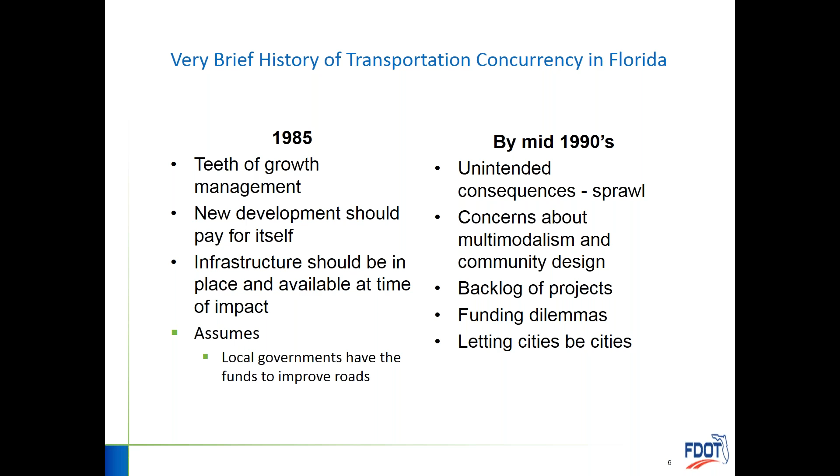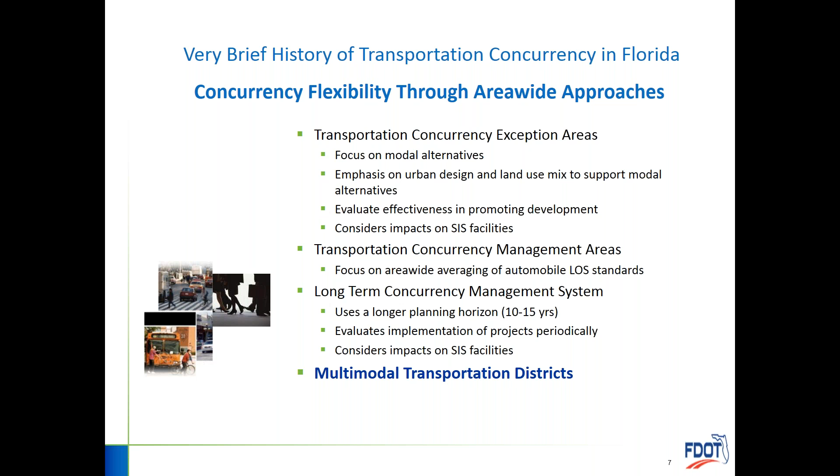And then Gina mentioned some of the flexibility approaches to dealing with the limitations of concurrency. Multimodal transportation districts were sort of the last generation of exceptions.

Now we'll get to the not-as-brief history. It's a non-auto mobility focus. Right out of the statute, it said primary priority is safe, comfortable, and attractive pedestrian environment, convenient interconnection to transit, and then the next bullet down, secondary priority is vehicle mobility. This is pretty big stuff in 1999.

And then there were also various funding opportunities with different strategies and monitoring. This is the handbook that came out. Both of these came out in 2004, I believe, maybe the end of 2003 for the handbook. The companion document is the model regulations and plan amendments for multimodal transportation districts, which provide the DNA, so to speak, on how to do this.

I should point out that the legislature directed FDOT to develop multimodal level of service methodologies and also to allow an area-wide level of service. That was the genesis for this work.

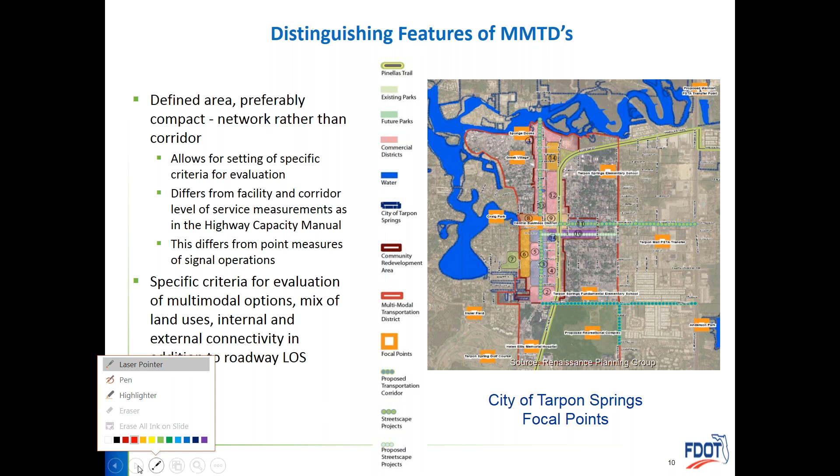So as part of doing the Tarpon Springs MMTD, the first thing, once they determined what the boundary of the district would be, is to do a summary of existing conditions. This slide shows the MMTD segments for Tarpon. The multimodal district is bounded in blue, and one of the things that's nice about this type of development is that the boundary was chosen to encompass the community redevelopment area as well, so they could use some of that tax increment financing to help with the actual development.

So in doing that existing conditions summary, the pedestrian level of service was not bad on those key segments, and even the connectivity was not bad. The detriments were the auto-oriented land use with large setbacks, parking lots, and then the traffic volume on Alternate 19 creates quite a barrier between different parts of the district.

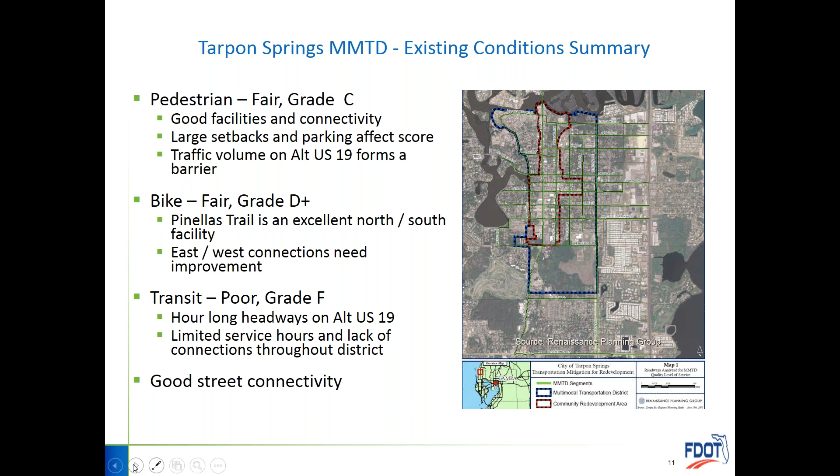Now, going back to the handbook, we'll get a little more into this, but I just wanted to point out that as part of establishing a multimodal district, the idea was to also set targets or standards for the level of service for each of the different modes. In the handbook, they give two samples of what those targets could look like. One is more transit-oriented with better transit level of service, and the other is more non-motorized oriented, with better bicycle level of service but lower transit level of service. This is just to show the idea that you can do some trade-offs, and we'll show later in the presentation how these can be tailored for specific facilities or zones.

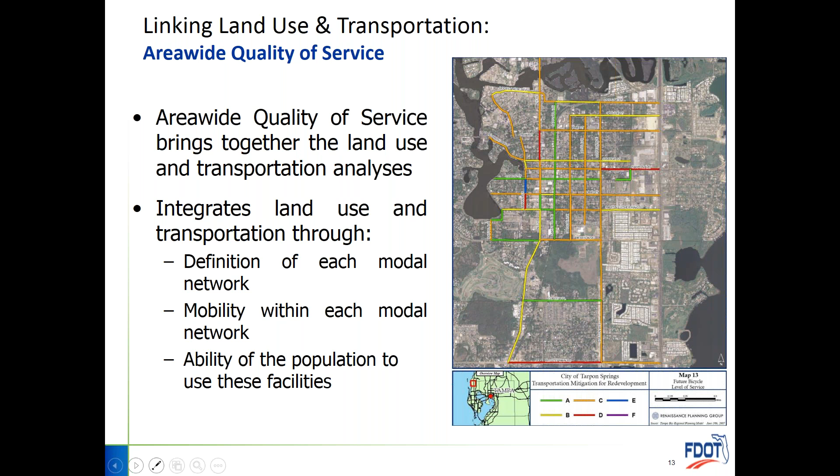The area-wide quality of service brings together the land use and the transportation analyses. The way that's done is that you define each modal network, just as you define the boundary. You define which facilities you're going to focus on and measure, and that provides the key mobility. Then you measure the mobility within each modal network, which is what this map is doing. And then the last piece is where you look at the ability of the population to use the facilities and to actually get where they're trying to go.

This shows what the 2025 build-out analysis is of the MMTD. Tarpon used the SmartCode for their district, and we're going to talk a lot about different codes and contexts in the coming slides. But based on those densities and intensities within the CRA and future land use, it was determined that there'd be roughly 4,000 households, almost 8,000 population, and a little over 8,000 employees would be expected, and that it would increase 8,000 trips onto US 19. So you have a defined area, you have a reasonable projection of what build-out's going to be.

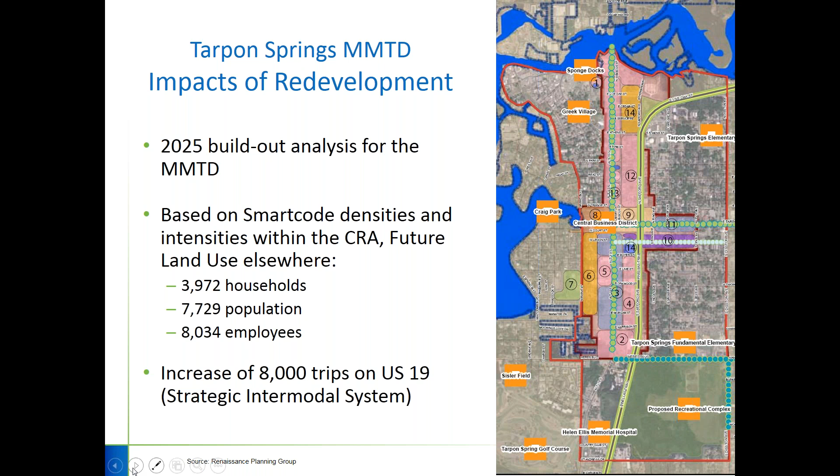So that provides a framework to begin to, as we'll show later, how you can use that framework later to cost out what it's going to be to create this build-out.

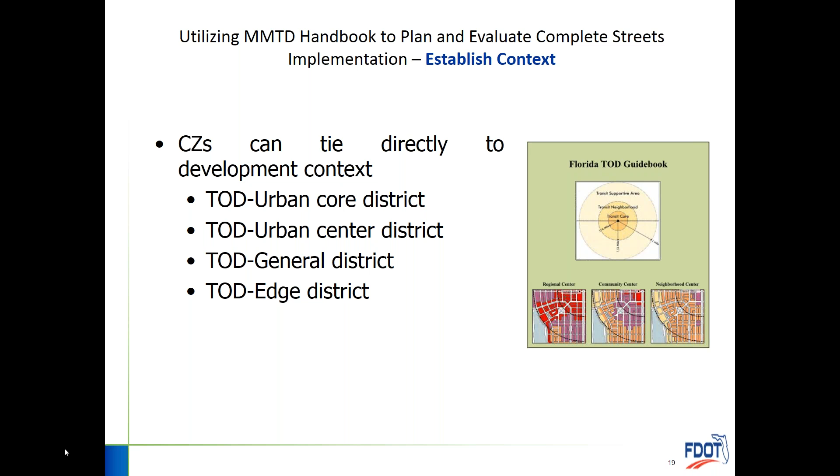We also looked at Florida's TOD guidebook, which is designed to provide guidance as to what really is a transit supportive area. And like the other documents we talked about, there's an urban core, an urban center, and again different levels of intensity. We compared how the TOD guidebook compares with some of the MMTD guidance, and it really was a pretty direct comparison.

So the MMTD guidance really applies to the more urban, and so it makes sense that the TOD guidebook would be very equivalent in terms of the type of development that's transit supportive.

One thing in the implementation of these is that the criteria really are targets, indicators of success, what you should plan for, as opposed to what's on the ground already. So there's some flexibility, you may or may not hit all of the targets, but it might make sense that it really is one of these different zones.

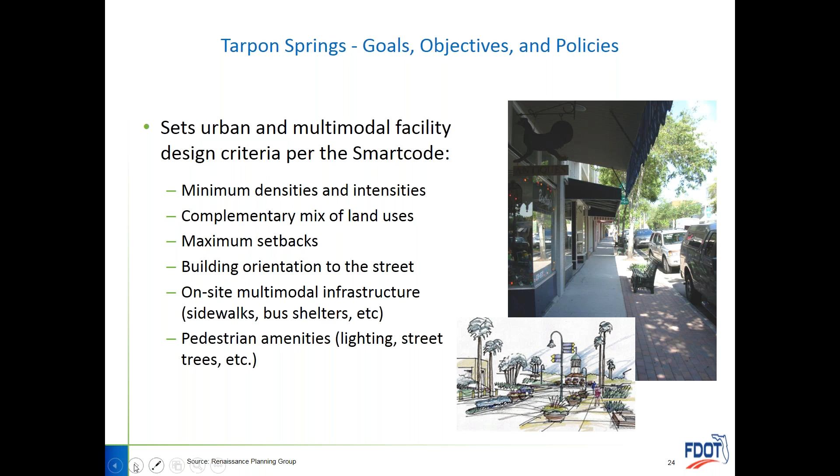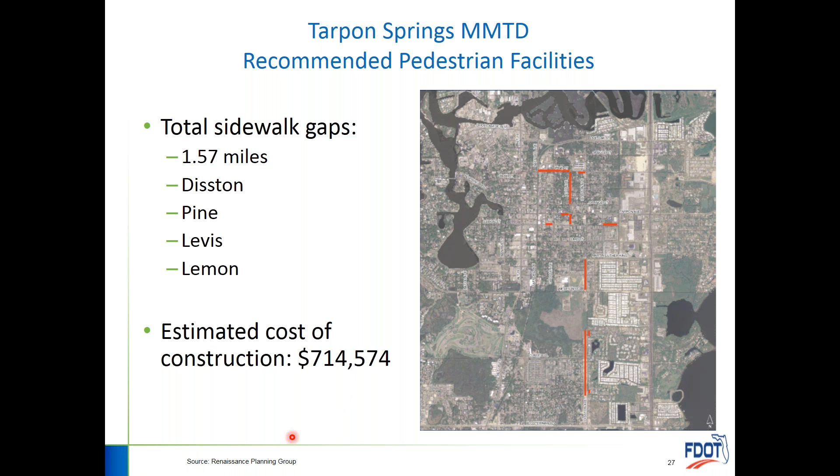For transit, the decision was made to put together a circulator route that ran 6 days a week, 16 hours a day, with 15-minute headways. And they were able to estimate the annual operating cost, and then also to increase the frequency on the alternate 19 route to two buses an hour.

And one of the really nice things about this type of scheme is that they were able to fold annual operating costs into their funding plan for the district, so that one of the things that's often difficult with transit - finding the money for operations and finding that money for a defined period of time - that was one way of doing it.

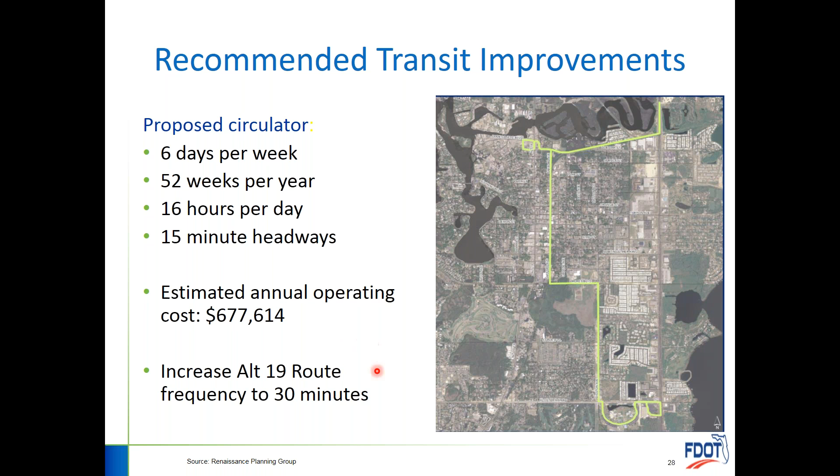So in terms of funding this now, you calculate the total cost of the capital improvements, determine the number of acres of land available for redevelopment, and then calculate the total number of units and floor area that can theoretically be constructed. And then based on that, calculate the trip ends. What's not in this slide is multimodal trip ends and that whole calculation process, but that's implicit in the idea.

And then calculating the cost of the trip by dividing the total cost of all the improvements and transit service by the total number of trip ends. And then you come up with a per-trip cost to the proposed project, and you can call that a mobility fee, or an impact fee on steroids or something to that effect.

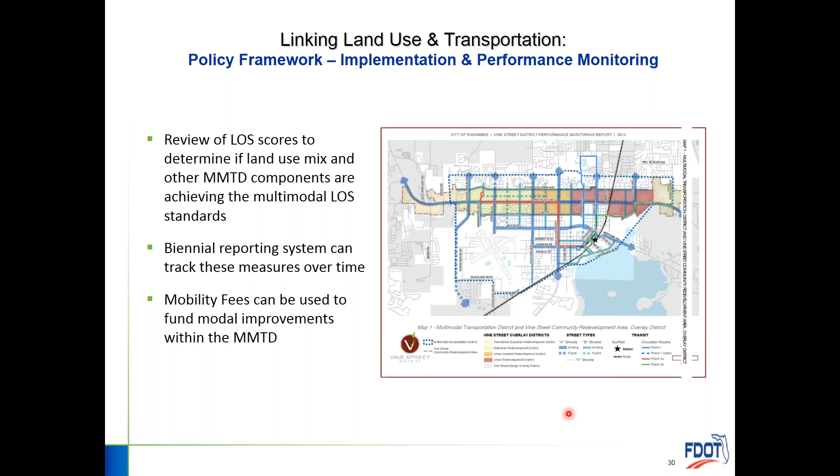So in terms of next steps, if the department were to explore using this tool to evaluate the context and setting for complete street projects, some of these existing multimodal districts, many in place for 5-10 years, can provide a proving ground for what actually works and what doesn't.

And there's room for refinement of the level of service standards for the different modes within the MMTD, and some more guidance on various planning horizons, and to some extent refinement of the level of service methodologies themselves might be something to also be explored.

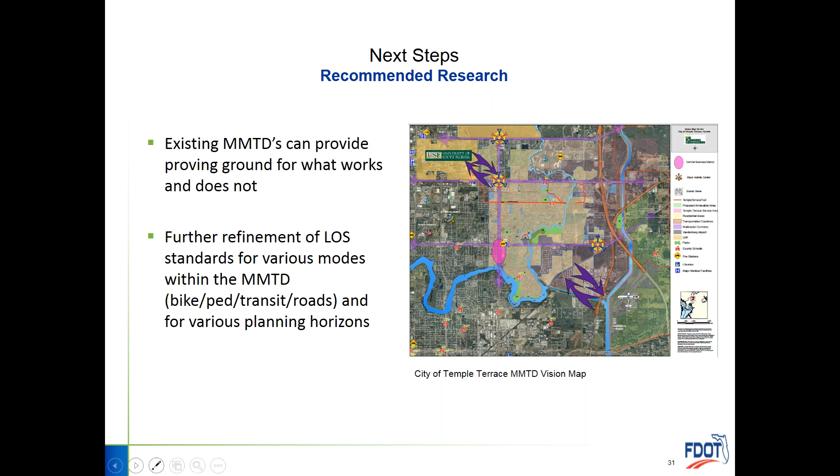Some possible next steps would be updating the model regs and plan amendments document for multimodal districts. The context zones that DOT—those draft zones we showed earlier—if that becomes formalized...

...then this report could be tailored to those different context zones. And then also sample level of service target scenarios could be included based on the context zone.

And within the individual multimodal level of service methods and the handbook and the software ARTPLAN, transit measures would be needed for rail, bus rapid transit, etc., express bus service, things like that, as the original transit component really dates back to an era where there was very little rail in Florida.